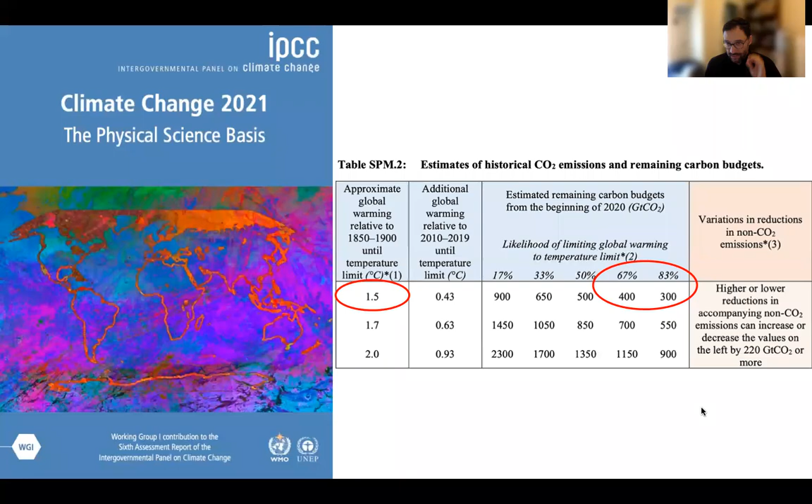I'm going to start by talking about the latest IPCC report, which stated that in order to keep global temperatures from rising no more than 1.5 degrees, which is what's outlined as the best target in the Paris Agreement, in order to have a high probability of staying at that level, we can only continue to emit about 300 to 400 gigatons of carbon. So I'm going to put that in perspective with our annual output. Each year, globally, we emit about 40 gigatons of carbon from energy-related resources.

So a linear phase out from that 40 annually by 2050, which is when you hear most people talk about a phase out, still emits about 600 gigatons of emissions. So well over our 300 to 400 allowance if we're going to have a high probability of staying at 1.5. What we actually would need is somewhere between a 50 and 65% reduction in the next decade and phasing out fossil fuel-based emissions from energy-related resources by 2040. That gives us a high probability it stays within the 300 to 400 range of gigatons emitted.

So this is really the timing we have. So we have an immediate peak, a drop, cut in half roughly in the next decade, and then cut the other half in the following decade. I'm going to tell you about how that's possible. In building decarbonization, we think about it in three different lenses: new buildings that have their emissions, existing buildings that have their operating emissions, and then embodied carbon of all the materials and construction that goes on in the built environment.

Now, we've seen these statistics before from Architecture 2030. These are global statistics derived from the Global Alliance for Building and Construction's Global Status Report from last year. They're going to be releasing their report here in about a week, so we'll see how these numbers have shifted. But building operations are essentially 27% of global emissions. And this is heating, lighting, cooling, water, and plug load, your traditional operating systems. 10% of the total emissions pie is building construction materials. This is typically structure and substructure of buildings and the materials that go into them in the construction.

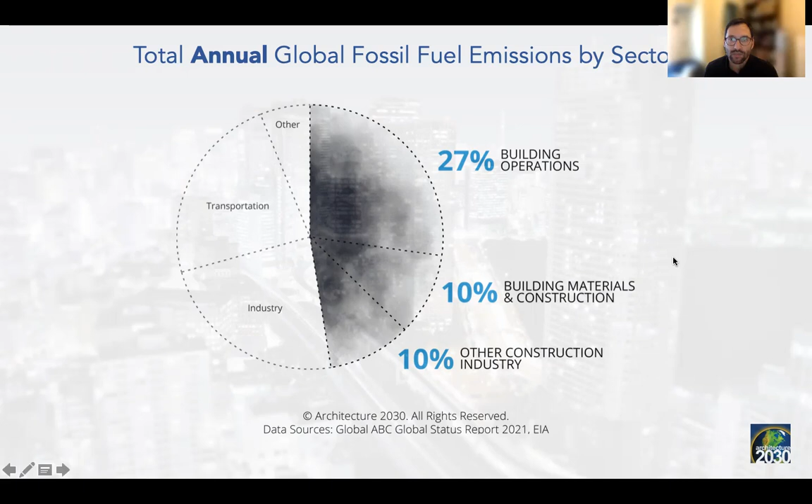There's also a new wedge that the Global Alliance has indicated, which is other construction industry. And we think this is roughly the exterior built environment, the roads, the bridges, the infrastructure, as well as other building materials that aren't in the structure and substructure. So this gives you a sense, it's roughly half and half between building operations and the embodied emissions associated with materials and construction. Now, we are slated to continue to build at a rapid clip.

Over the next 4 decades, we're expected to double our current existing worldwide building stock, about 2.4 trillion square feet. Most of this is expected to take place in urban areas. This building boom over the next decade will predominantly be in the global north. China will continue to build, Europe and North America. And then we see the building boom move to the global south, particularly Southeast Asia, Africa, and Latin America is where we'll see a lot of the building between 2030 and 2060.

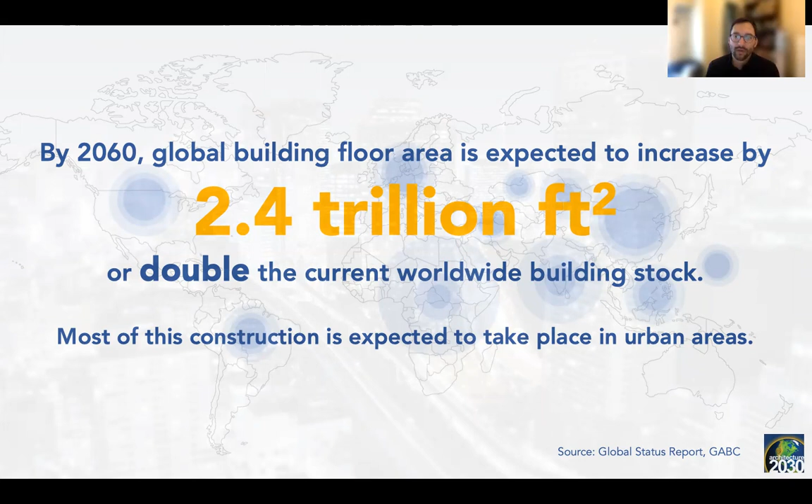But in 2040, when we're supposed to have phased out all of our emissions from the built environment, 2/3 of the buildings around in 2040 will be buildings that we have today. So if we don't intervene and reduce the emissions of that existing building stock to zero, we're still going to have those emissions in the future, and they're going to continue to be a problem for us. So revitalizing our existing infrastructure and reducing operating emissions from it is a critical step, and we'll talk a little bit about how that can be done. But first, let's talk about building operations from new buildings as well as existing buildings.

First, new buildings. New buildings, we believe the way to zero carbon operations is really a three-pronged strategy. We need to make sure that the buildings are efficient. That's a big part of the work that's happening at the 2030 districts, both for new buildings and existing buildings. We need to make sure that the buildings are using systems that are either all electric and powered by renewable systems, or that they have some form of decarbonized thermal energy for their heating, and then their electricity use is powered by 100% renewable electricity.

So let's unpack a little bit about how we're doing on energy efficiency. The latest code standards, ASHRAE 90.1 2019, roughly equivalent to the International Energy Conservation Code of 2021, are the bars on the right in terms of energy use per square foot. The bars on the left of each of these areas are the CBECS average, the Commercial Building Energy Consumption Survey that you all use as a baseline for the 2030 districts.

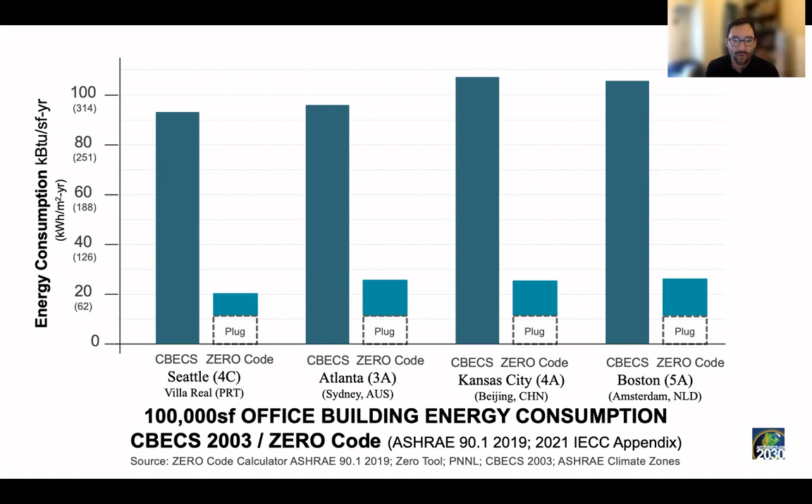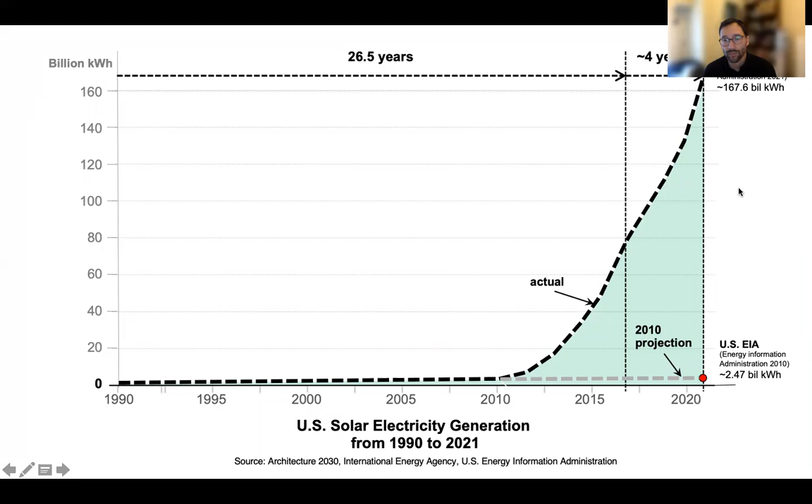At the same time, we're seeing a proliferation in renewable electricity. You can see this is US solar electricity generation. And you can see that around 2010, the projection from the US Energy Information Administration was that we wouldn't really increase solar production very much over the next decade. But the actual is pretty impressive. We've actually doubled the capacity of solar in the US just in a 4-year period. And we're slated to continue to double at that rapid clip. The projections will continue to go up and up. And I'll talk a little bit about why that is.

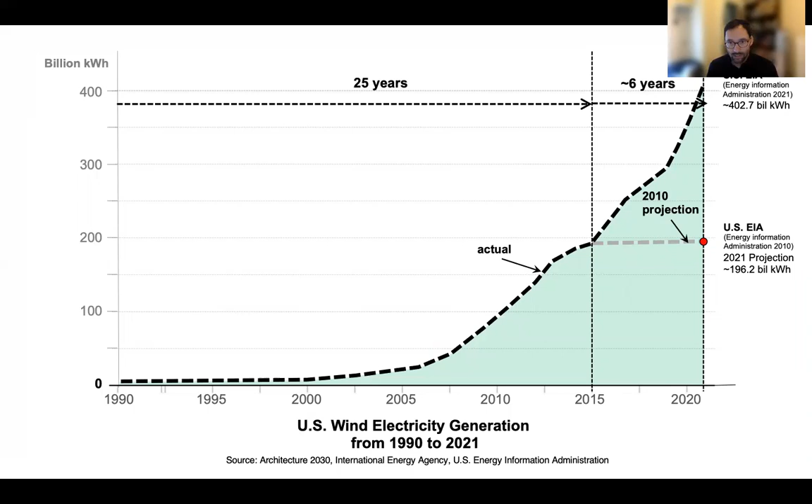Wind, very similarly, the projection in 2010 is it would essentially remain stagnant. And what we've seen instead is a doubling since 2015 of what was already in the market. So we're seeing tremendous proliferation of wind and solar. The reason for that, and it's happening globally as well, is the price of these technologies is going down and down. You can see in over a 10-year period, the cost of a megawatt hour of electricity from solar went from $359 to now roughly $40. Wind and solar are the cheapest form of new electricity generation.

And we're starting to even see them phase out existing fossil fuel plants for electricity, not just being the majority of new generation capacity. We're also seeing the same trend happening in battery storage, which is really important for seasonality differences of using renewable electricity. The reason we're seeing these price drops is these are technologies that are improving year in and year out, and they're getting cheaper and cheaper to produce.

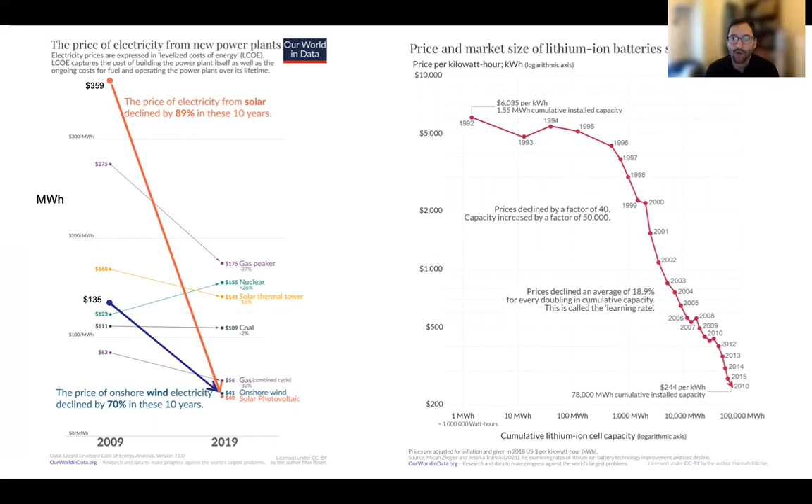So what that tells us now at Architecture 2030 is that we are ready to actually meet the 2030 challenge today. We have the technologies on energy efficiency, and we have the renewable energy resources to reach zero carbon operations at this moment. And so we're encouraging all the 2030 districts and all the practitioners to focus on new construction achieving zero carbon emission operations today.

We're actually not alone in that, and we're seeing policy examples where jurisdictions are making zero net carbon buildings the norm. In just a few weeks, the City of Boston's planning agency will pass a new zoning ordinance that will require buildings to meet carbon emission performance standards for new construction, and then have on-site renewables and procure the remainder of their energy use from renewable power programs, a variety of methods. So we're seeing that this will be the norm. And Boston's got not only a colder climate, it's got humidity as well, but it also has very complex building typologies like laboratories and hospitals.

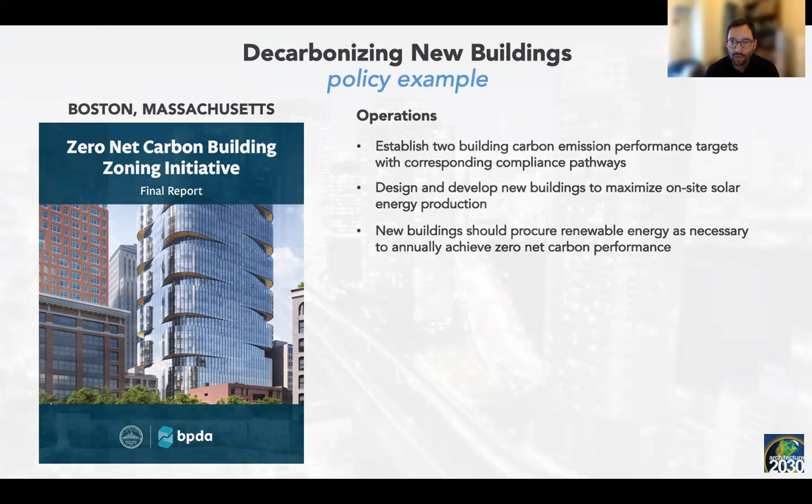So if they can do it in Boston, we believe you can be doing it anywhere around the world to reach these goals. Now let's focus on existing buildings. The same formula applies to existing buildings. We need to improve the efficiency of those buildings. We need to make sure that they're powered by decarbonized systems, either through electric systems or another form of decarbonized thermal energy, and that all of those energy systems are powered by renewable electricity.

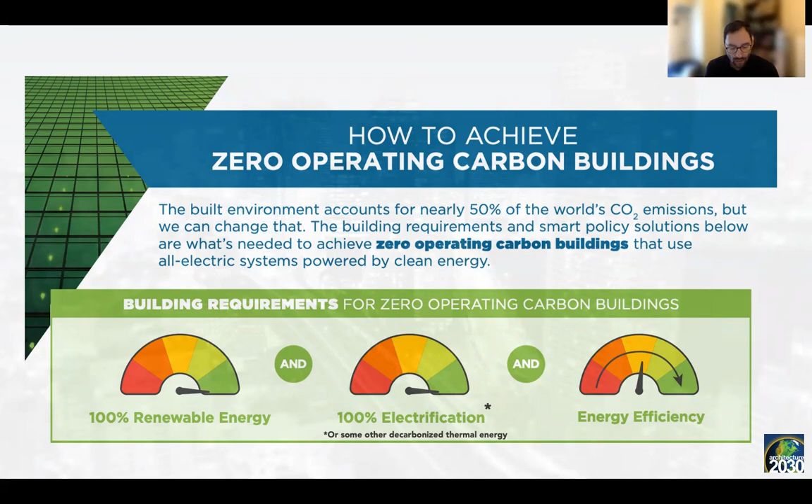So when we think about the existing building stock, though, our research has led us to have a two-pronged approach. When we look at all the existing buildings, we see a very small number of buildings in the downtown cores, like 2030 districts. Approximately 5% of the total number of buildings in any city are responsible for roughly half of the emissions. Depending on the city size, it's a little bit more, a little bit less. Now, the other 95% of buildings, literally hundreds of thousands of buildings in certain cities, are responsible for the other half of the emissions pie from the built environment. And you can learn more about our research on our Achieving Zero website, which I'll talk about in a moment.

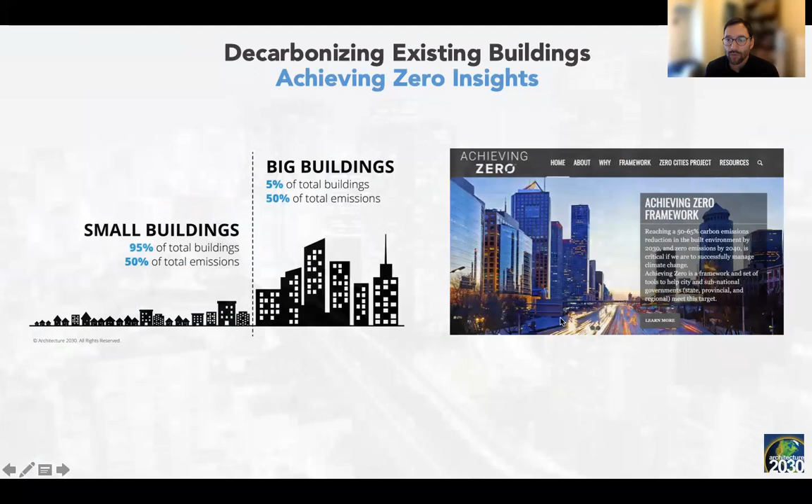But what's really interesting about big buildings, and you're familiar with this with commercial real estate, is they typically have long-term capital improvement cycles and budgets. Maybe it's 5 years or 10 years, you're going to improve the building, either the systems or aesthetically. Some buildings move from a Class A office building in the market into the Class B category and need to be revitalized in order to be back in Class A. So there are these improvement cycles built into commercial real estate, and leveraging those for decarbonization upgrades is a great time to do that.

There's also, as I mentioned, a small number of buildings that are responsible for most of the emissions here. And so we can get a really large impact from a small number of buildings that are working towards these goals. And the 2030 districts are examples of that. We also know that the systems in these buildings are very complex and vary significantly from building to building, which leads us to more performance-based targets.

So that's where you see that the 2030 Challenge goals were performance-based for existing buildings, looking to reduce emissions by 50% by 2030. And those are opportunities for design professionals and real estate professionals to work together to find out what's best for the system. That includes renewable technology and procurement. It includes system swap outs at end of life and efficiency improvements in the envelope, all working together to achieve these reduction goals.

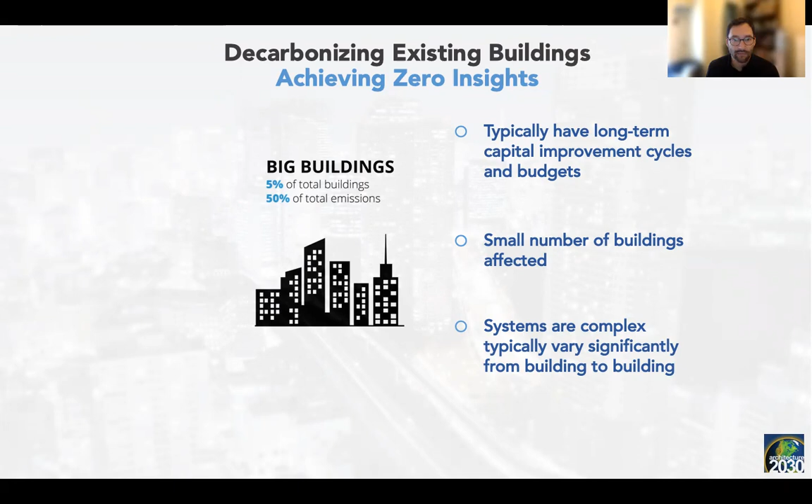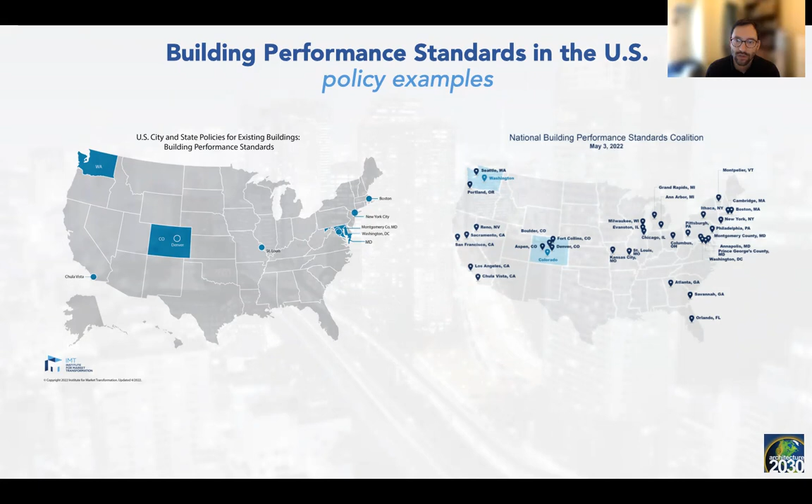But we've also seen policymakers take an interest in large existing buildings and create policies around building benchmarking disclosure ordinances, as well as building performance standards. What started as just a handful of cities is now a national coalition of cities and states working to develop performance standards for existing buildings. Some of these are energy-based and some are emissions-based. Those that are emissions-based, we think, are really driving towards the goals and ratcheting down emissions over time, and allow for a variety of performance-based pathways like renewable energy procurement and generation, system swap outs for clean electric systems or decarbonized thermal, and then allow for efficiency to play a role as well to reach the targets.

Now, the other side, which is really challenging, is the hundreds of thousands of smaller buildings, usually under 20,000 or under 10,000 square feet. There are just so many of them, and they're collectively responsible for the rest of the emissions in the built environment. But they don't have a typical planned capital improvement cycle or budgets in the same way that large commercial real estate does. So adequate financing is definitely a critical barrier to getting energy upgrades in these smaller buildings. And again, we have so many of them that we need to think of phased approaches to reaching them over time, not all-at-once, date-certain mandates for this large majority of small buildings. And finally, what is working for us is we recognize that the systems in these buildings are relatively simple and consistent. We know exactly where the carbon emissions are coming from.

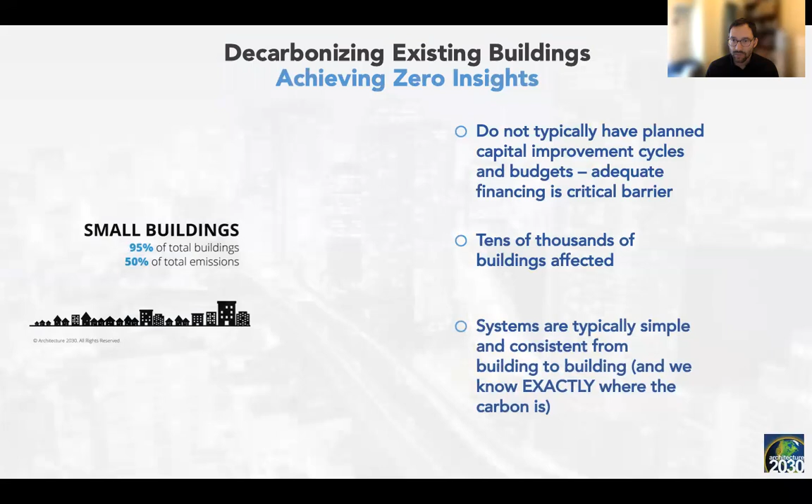The large majority is coming from heating, hot water, and space heating. Some from cooking, but mostly that's where we're seeing that. So focusing on those systems, we can be more prescriptive about the approaches we take to the smaller building stock.

But we have to leverage what we call building intervention points, which are points in which the building is already going to go through some sort of improvement process, or there's an opportunity for financing or vacancy or opportunities to go into the building to do the upgrade where we're not disturbing folks. So that can be a capital improvement cycle like we talked about for large commercial buildings.

But for smaller buildings, it can also be times of lease or sale when the property is getting ready for sale, or after it's sold, it can be upgraded because there's a financing mechanism there. Either the property owner is getting the building ready to sell it at a higher value and wants to improve its asset value, or the new owner or tenant is coming in and wants to improve the building. There's financing associated with low interest mortgages over long terms, as an example in the residential market.

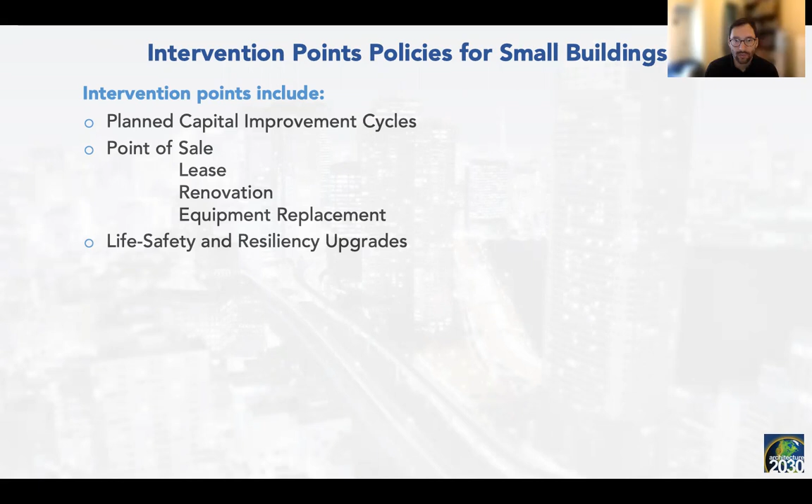But we can also look for periods when we're renovating other systems that might not be our mechanical systems or our envelope systems that give us an opportunity to build on top of that, or equipment replacements if some of the equipment dies. Like our water heating systems, to replace those systems with more efficient technologies, as well as those powered by decarbonized systems. But there's also opportunities in the movement to improve the life safety and resiliency of real estate in the smaller building stock, as we work for incentive programs or policies on resilience and life safety to do the decarbonization at the same time.

And we think that these are really, really critical to get at scale, because they reduce the upgrade cost. If you did it at one of these interventions, you're already doing work in the building, you're not coming in cold, and so the costs are not as high. You're talking about incremental costs instead of complete upfront costs. We also mentioned the financing options for low interest rates over longer terms that are available that could be bundled with the upgrades, and the less disruption, because many times the building might be vacant from tenants or occupiers.

But it also ensures that these cycles of renovation will happen over time and consistently, so that we're not, again, burdening the workforce or the market with throwing technologies and workers at thousands of buildings all in the same year, but that we upgrade them consistently. And it also includes long-term job creation.

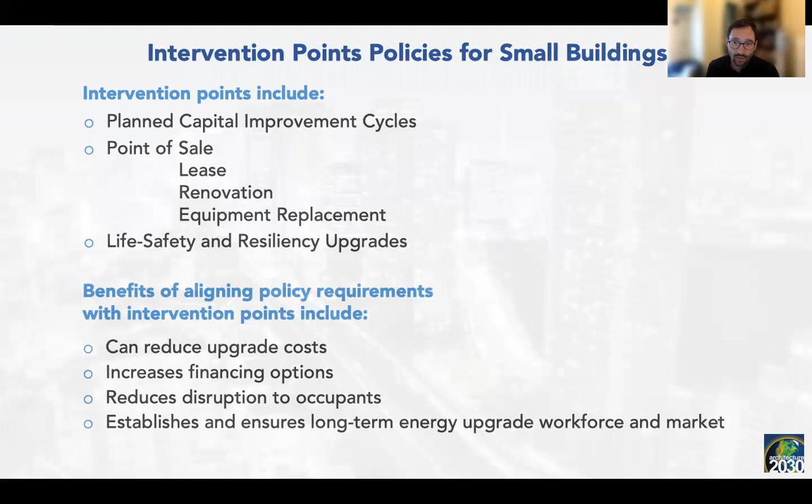We are seeing policy examples in this space too, so I wanted to mention that the city of Ithaca is looking at decarbonizing every single building within its jurisdiction, and pretty much all of those buildings would be considered small buildings. So they're building financing mechanisms, workforce training, system education about how we have what we need on the shelf technology-wise, but we need the workforce, we need the understanding about how do you finance this work for smaller buildings, and they're working towards those goals. And we're hopeful that we see more and more jurisdictions approach the small building stock.

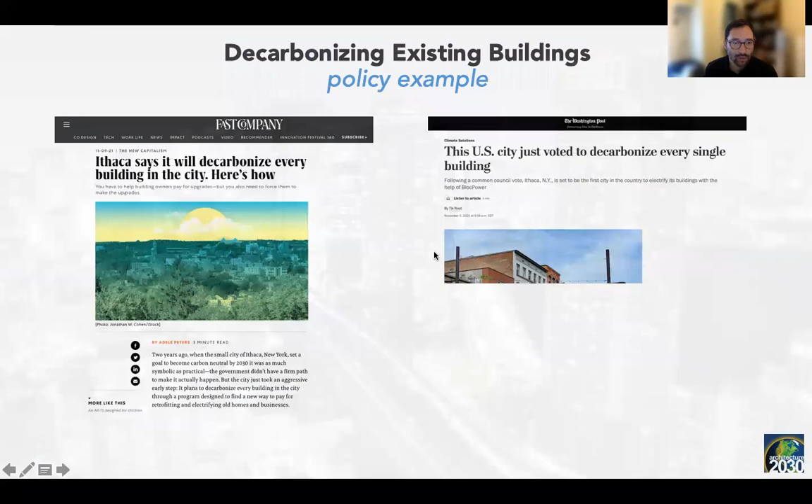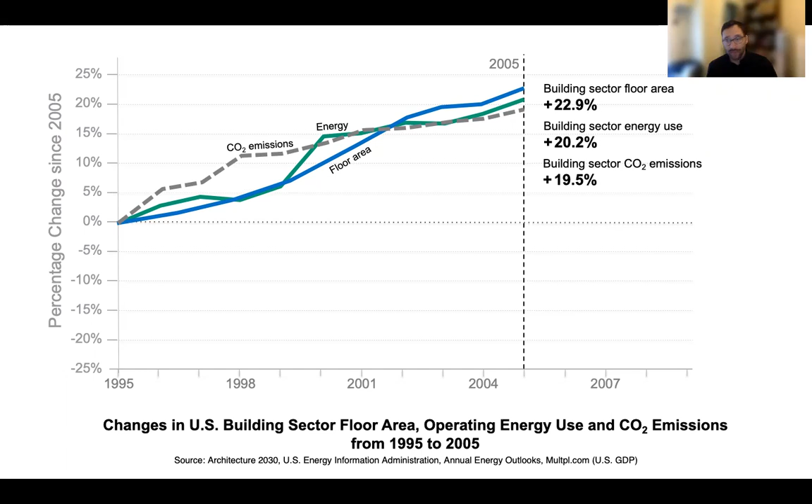So how is all this working for us on building operations? Where are we typically coming from, and how much have we improved since we started to focus on this? Well, this shows the change of floor area, operating energy use, and emissions since 1995 to 2005. And you can see that they're tied together. As we increase building floor area by 23%, we also increase building energy use by 20% and building sector emissions by 20% roughly over that same period of time. And this has been true since the dawn of the Industrial Revolution.

Now, if you look at where we've come since 2005, since we introduced the 2030 Challenge, since we've started to introduce more efficient building codes and standards and policies, you see that floor area has gone up. We've added 53 billion square feet of buildings in the US, just under a 20% increase.

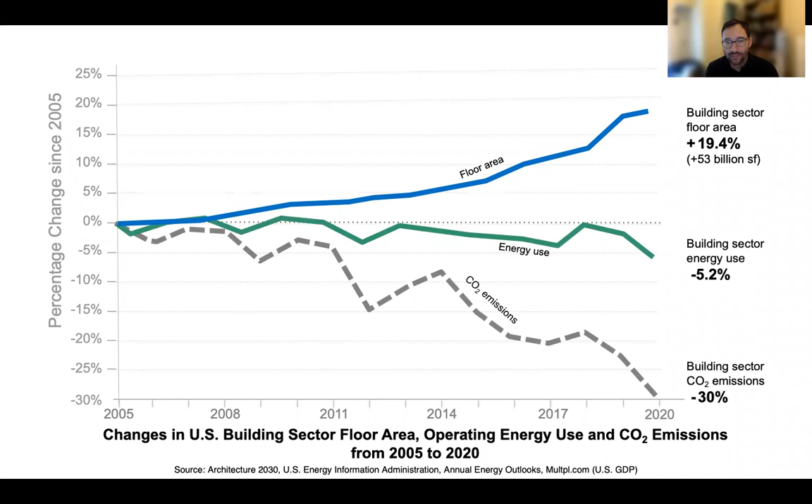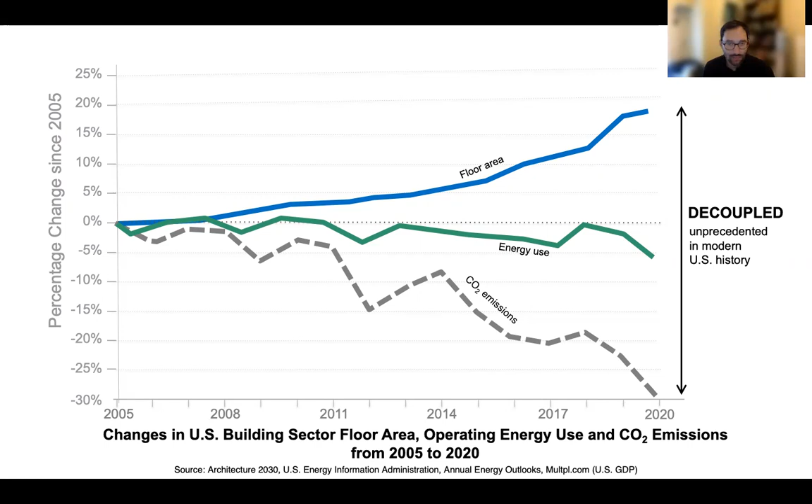But at the same time, we've kept energy use level in the built environment in the US and actually reduced emissions by 30%. This is unprecedented in modern history. This decoupling of economic growth in the building sector, flatlining energy use, and actually reducing emissions. A big part of the reduction of emissions comes from that proliferation of renewable energy. If you were to go back to those slides, you'll see a lot of that started to grow exponentially around 2005. So this is despite the recession, and we're seeing that this trend is moving forward also globally.

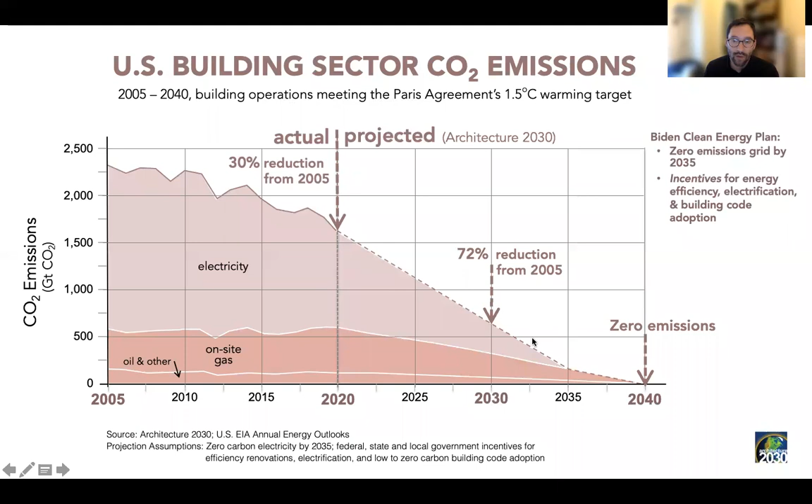You saw where the trend was for renewables. So we think that we'll actually phase out electricity emissions rapidly. But the question is, how do we get at these on-site fossil fuel uses, and how do they decarbonize over time, leveraging intervention points and capital improvement cycles to bring them down in the existing building stock? So this is where the plan is, and we're on a good trajectory to reach zero carbon operations by 2040.

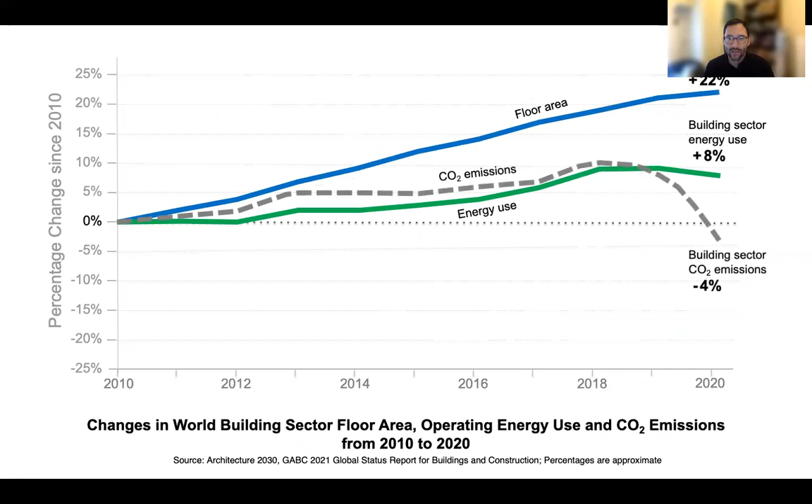And we're also seeing these trends play out at a global scale. So floor area growth, this is energy consumption. You'll see it's starting to flatline a little bit, and then emissions are actually going down, because we're seeing the same trends we've seen in the US for the last 15 years now starting on the global scale.

I'm going to spend a little bit of time talking about embodied carbon. I know it's not a set goal of the 2030 Districts, but it is an emerging area of interest and really requires all of us to work together on this issue. Now, I mentioned the doubling of the building stock and how much of the emissions from that new construction is embodied carbon in the materials and the construction versus operation. Well, in year one, before you turn on any lights or systems in those buildings, it's all embodied carbon. It's all in the materials.

And it actually takes close to 20 years before the operational emissions even get close to covering the amount of upfront emissions. And we actually think that those will decline, again, because of the proliferation of renewable energy. But what is concerning is the time value of carbon. Again, we have to halve emissions in the next 10 years and phase them out by 2040. So if we don't get a handle on embodied carbon, those are emissions that go up right away that we then have to sequester over time to pull back out.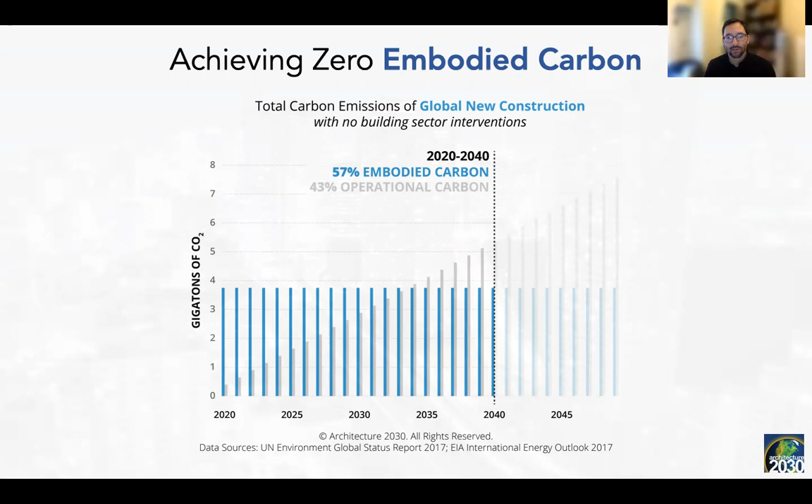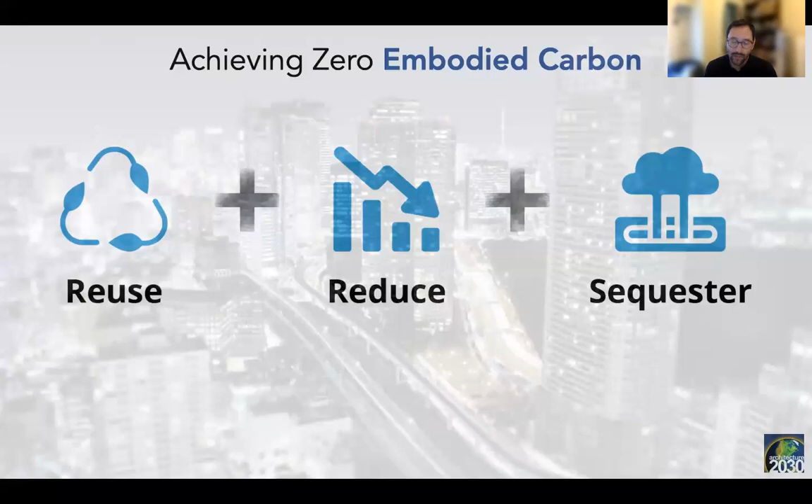So it's really important we get a handle on the materials and the construction practices of our new construction. And we think that there are strategies for reuse, reduce, and sequestration to help us do that. I'm going to go into a little bit of detail about each. On the reuse category, we've often heard the comment that the greenest building, development, or neighborhood is the one that's already built. And we believe that that's true.

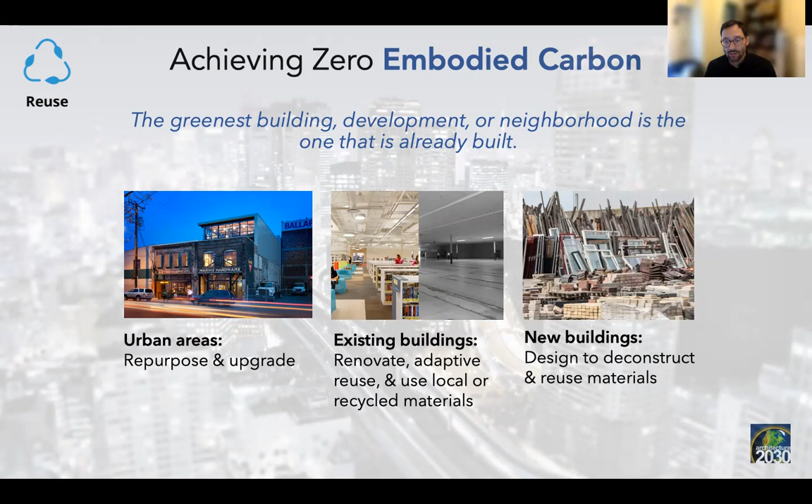Repurposing existing urban areas helps reduce growing infrastructure needs from urban sprawl and the embodied carbon associated with that infrastructure. We also know that existing building reuse and revitalization is really critical to make use of the carbon that we already have in our building stock, and that many of our properties are vacant and need upgrades. And so we not only reduce the operating emissions, but the embodied carbon of building new. But we also have an opportunity to reuse existing building materials through deconstruction rather than demolition. So that's on the reuse side.

On the reduce side, we recognize that we don't want to grow too fast, too big on a regional scale because of the infrastructure implications and the embodied carbon there, so we're better off doing infill and densification to make use of the infrastructure that we already have and reduce the need for new ones.

But we also have opportunities at the building level to optimize the structure, in many cases use less material or use lower carbon traditional materials that we would see like concrete and steel, which are working really hard to decarbonize their heavy industry emitting sectors.

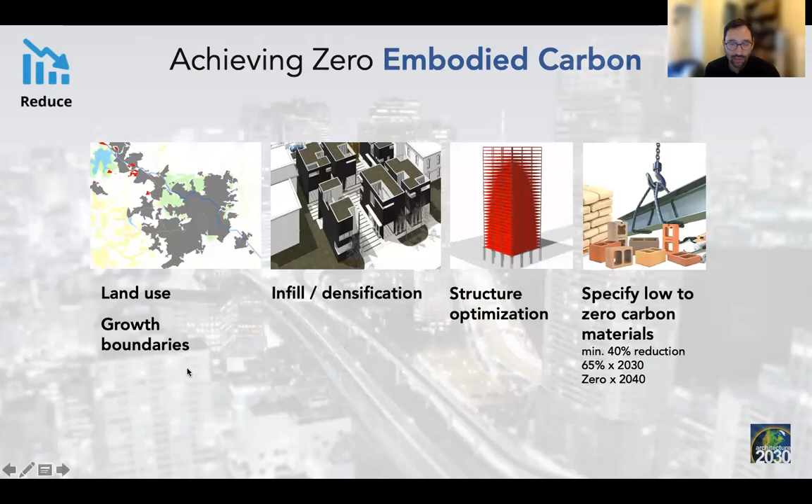And then we also know the built environment is an opportunity to sequester emissions, not just through more traditional systems like timber, which is getting a lot of interest in sort of mass timber for larger buildings, but also in our other materials like concrete. People are mineralizing CO2, putting it in, creating aggregate. They're injecting CO2 into the concrete mix. We're mixing biomaterials in with traditional materials and scaling those.

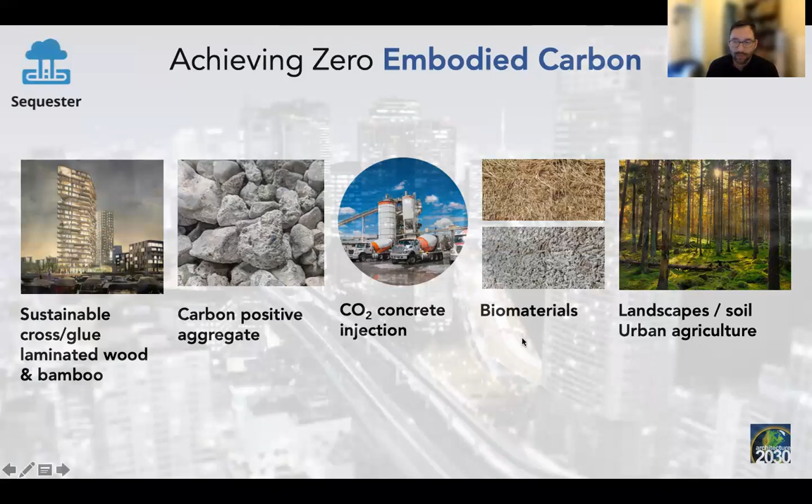But there's also opportunities in our landscapes and urban infrastructure to look at sequestration opportunities in vegetation. All of this can help lead and draw down emissions.

And we're seeing a number of different disciplines in the design professions taking their own stock of where they are responsible for embodied emissions. You've all heard of the AIA 2030 commitment program, which has a lot of synergies with the 2030 districts targets for design professionals in architecture, but we're also seeing mechanical engineers through MEP 2040 focus on their systems, and the leakage of refrigerants is one example of that in terms of emission source.

Structural engineers focusing on optimizing structural design and focusing on procurement of high impact materials. Climate positive design, which is focused on landscape architecture, reducing emissions in their material selection, as well as opportunities for sequestration. And contractors also now have a commitment focusing on how they help reduce emissions in construction practices through electrical equipment, as an example.

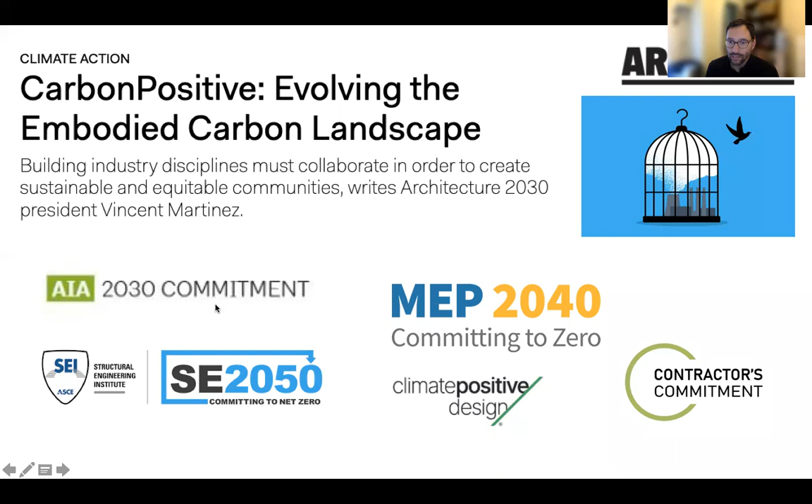So this is all an evolving landscape, and all the different disciplines are taking stock of this and working towards this. But we're also seeing it happen in policy making. I'd like to mention that we're seeing cities around the globe leading on policies to focus on embodied carbon, either at the material level, like low carbon concrete codes, or on a whole building life cycle assessment and targets. And our colleagues at Carbon Neutral Cities Alliance have been leading on that work, as well as C40 Cities. And Carbon Leadership Forum has toolkits for both design professionals and policymakers on embodied carbon policies.

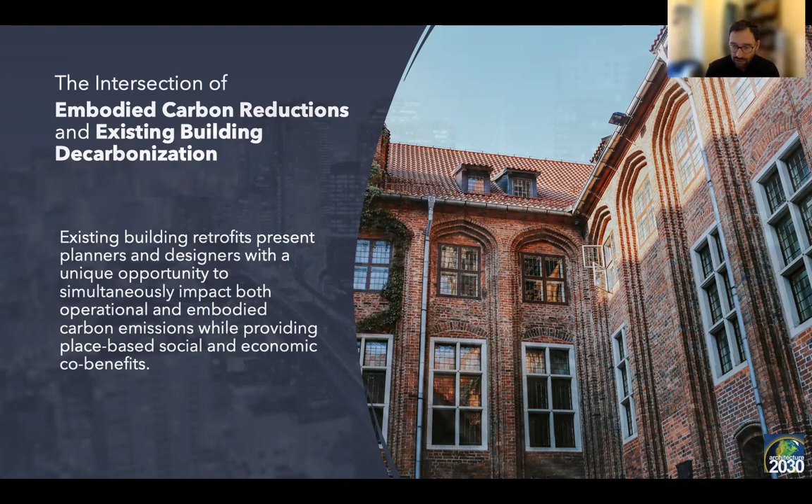Now, just a few more slides to end here, going back to my points about the reuse of existing buildings being both a synergy for operational emission reductions through retrofitting these buildings for energy upgrades, like we mentioned, through intervention points and capital improvement cycles, but also that keeping these existing buildings and revitalizing them instead of building new buildings to meet those needs is also an embodied carbon win. And so the 2030 districts, I think, can play a really interesting role in this intersection.

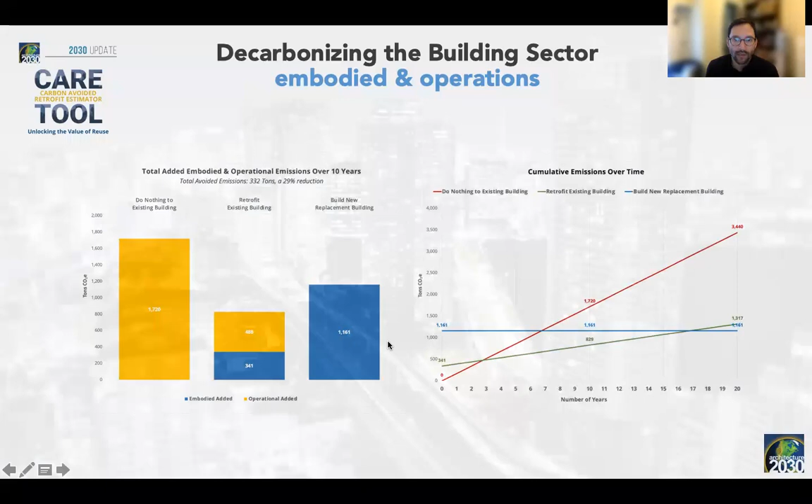And in order to support that, Architecture 2030 has recently launched something called the Carbon Avoided Retrofit Estimator just this week, which focuses on quantifying the impacts of keeping existing buildings for both operational and embodied carbon reductions, and quantifies that over time. And it goes back again to that time value of carbon, about the impacts that we're doing up front in terms of embodied carbon that we can't get back, but we can adjust the operations over time.

And finally, I just want to recognize that the building sector is just part of the broader built environment. So buildings, and then there's infrastructure and the in-between spaces of the exterior built environment beyond the building. And we're engaging in new relationships with civil engineers, urban planners, and landscape architects to focus on opportunities for operational emission reductions, embodied carbon reductions, and sequestration in the exterior built environment.

And I think 2030 districts are ripe for this area because you have a membership of the buildings, but conceptually we're in a district. And so we can talk about opportunities in between buildings for these nature-based solutions that reduce not just embodied carbon, but also are great opportunities for stormwater infrastructure, for biodiversity, for livability, for lowering urban heat island effect. So there's just so many co-benefits to focusing on infrastructure and planning that we're excited to be involved in this role.